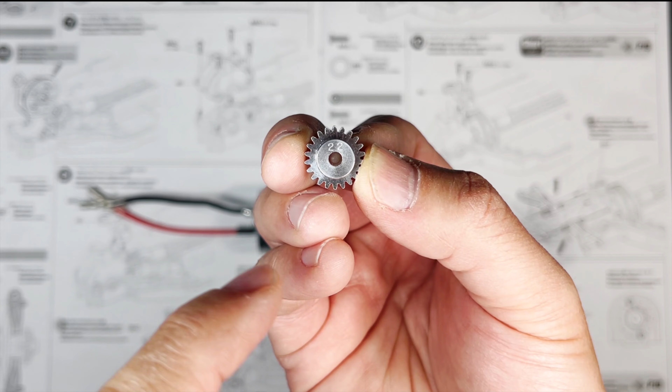This TT-02 kit comes with a 22 tooth pinion gear. That's the number of teeth that goes around the entire gear. There are option parts that have fewer or more teeth. And the number of teeth on the pinion gear and spur gear affects the acceleration and top speed of the car. But that's also another video all by itself.

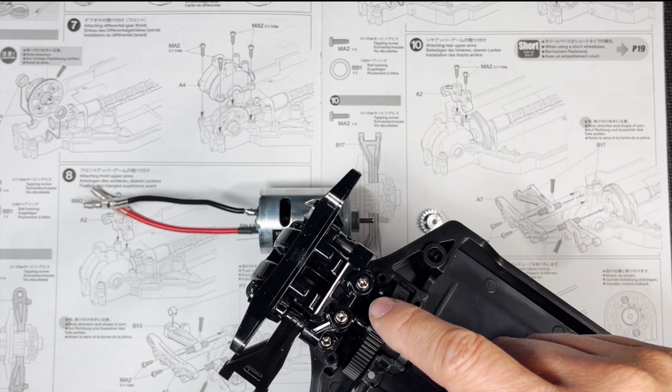For now, we only have to work with what's in the box. So when the motor spins, the pinion gear is going to spin the spur gear. The spur gear and the shaft is going to spin the differentials on both sides, and the differential is going to drive the wheels.

We'll talk about the relationship between all of the electronics and the car's systems in an upcoming video. All right, let's get started with step 11.

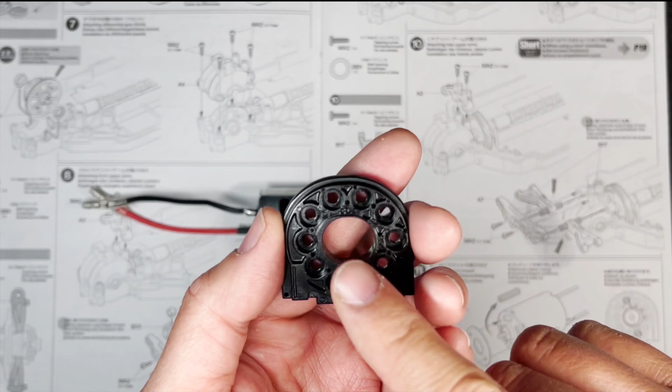First, let's take a look at the motor mount. There are numbers stamped next to all these holes. Starts at 21, 22, 23, 24, etc. And on the opposite side, it starts at 16 and it goes to 20.

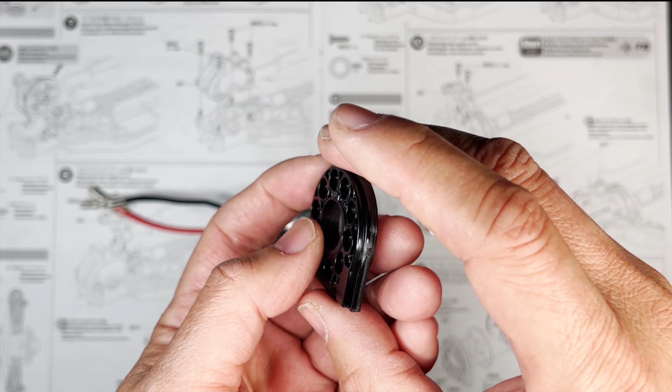And again, we have a 22 tooth pinion gear. And Tamiya made it really easy. The holes on the motor mount is going to correspond with the number of teeth on the pinion gear. So we're going to be working with hole 22 right here and then directly across, which is this one.

And so we're going to be screwing it onto the corresponding holes on the motor, which is going to be this one and this one.

And to fasten the motor, we're going to be using this MA4 screw. If you take a close look, you can see the teeth are a lot closer together. This is the MA2 screw we've been using a lot. The grooves are a lot further apart and it's slightly tapered top to bottom.

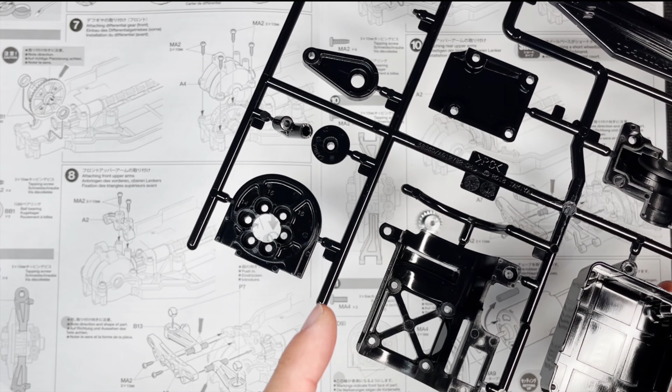And for whatever reason you want to use a smaller motor, there's a 380 size motor mount right there.

All right, to get started, first by putting this motor plate onto the two holes. I'm going to line that up. And I'm going to assume this motor plate is a heat shield between the motor and the plastic motor mount. So I have to make sure the holes line up, press it all the way down.

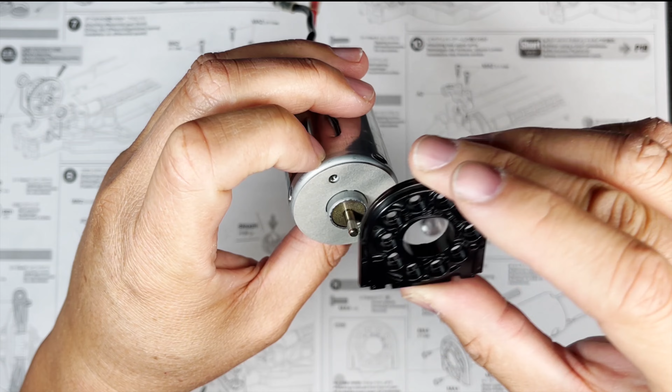And I'd like to have the label right side up when it's in the chassis, so I'm going to be using this hole on top. And on the motor mount, this would be the top, and this part goes into the chassis. So I'm going to make sure hole 22 lines up with that top hole right there, like that. And then start driving the screws in.

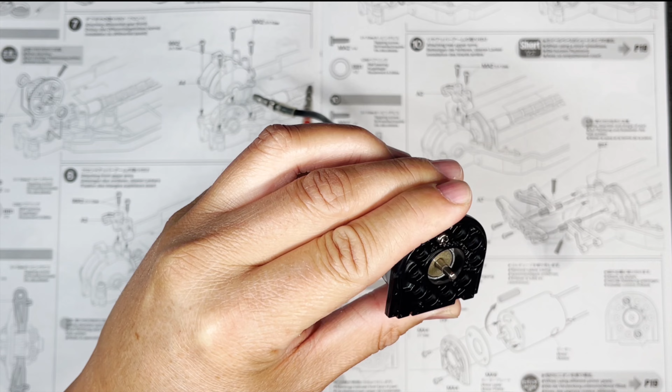Just like that. You notice there's a little box here. When using different pinion gears, go to page 19, just like we had up here with the short wheelbase.

Let's take a look at what's on page 19 for the pinion gear. It talks about the different gear ratios you can achieve when using a pinion gear, either with fewer teeth or more teeth. For example, when using a 16 tooth pinion gear, you're going to turn the motor mount over and use these two holes to mount the motor. The gear ratio is related to the acceleration and top speed of the car, but that's a different video.

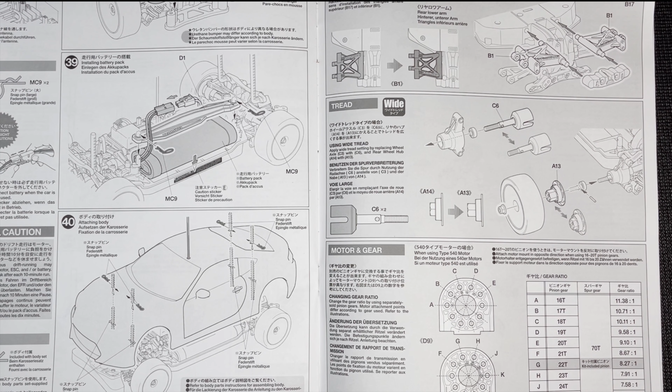All right, let's move on to step 12.

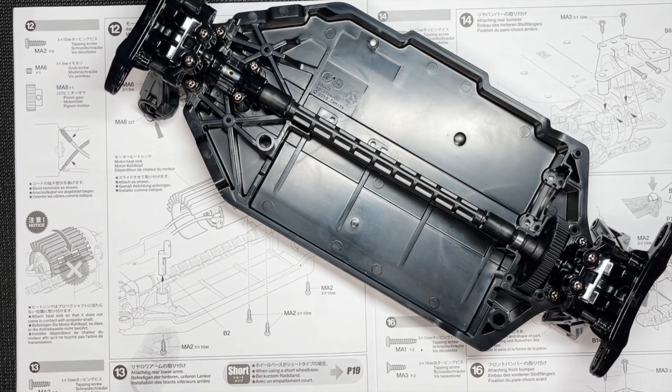For this step, we're going to need the chassis, the motor, the pinion gear, and the grub screw, 8 of these MA2 screws, the spur gear cover which was on the D tree, 2 battery posts, 1 of each was on the B tree, the heat sink, some grease, and a 1.5mm hex screwdriver. If you don't have one, there was a hex wrench included in the kit.

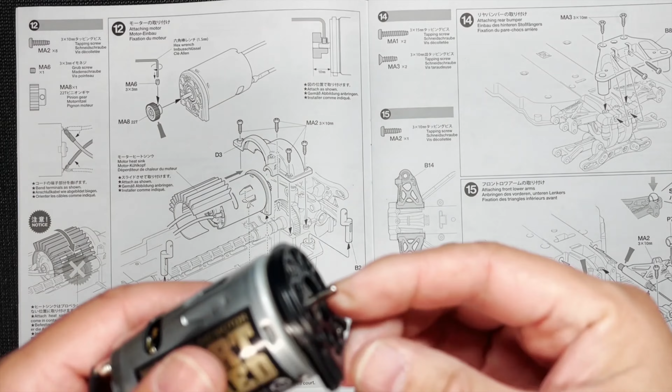Before we attach the motor onto the chassis, we need to put on the pinion gear first. So first we're going to thread the grub screw onto the pinion gear. Then we're going to find the flat spot on the motor shaft, and I'm just going to turn it all the way up to the top. We just need to make sure the grub screw matches up with that flat part, and we're going to just loosely screw that in.

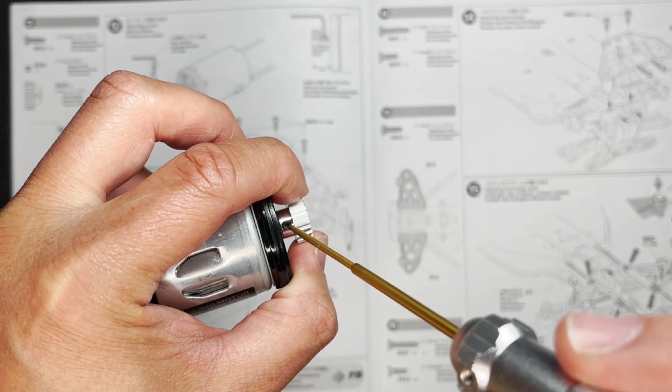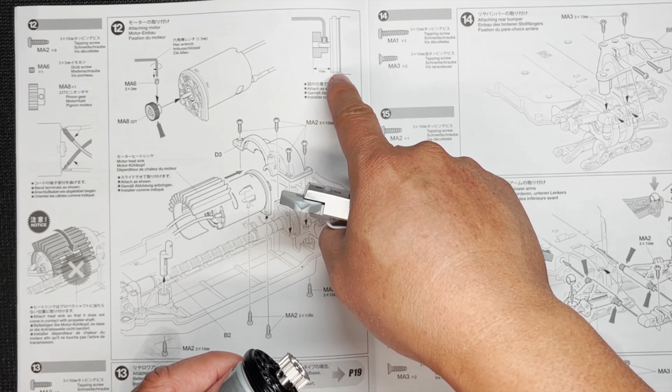If you see here, it needs to be 10mm from the top of the pinion gear to the face of the motor mount. That's going to be pretty close. I'm going to see what it looks like when we mount it onto the chassis and how it lines up with the spur gear. That's what you would do if you don't have a caliper.

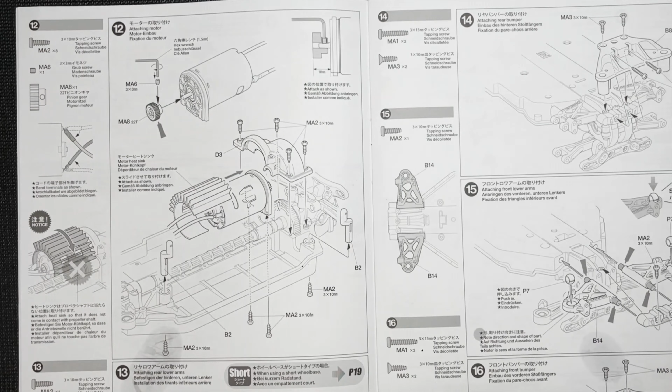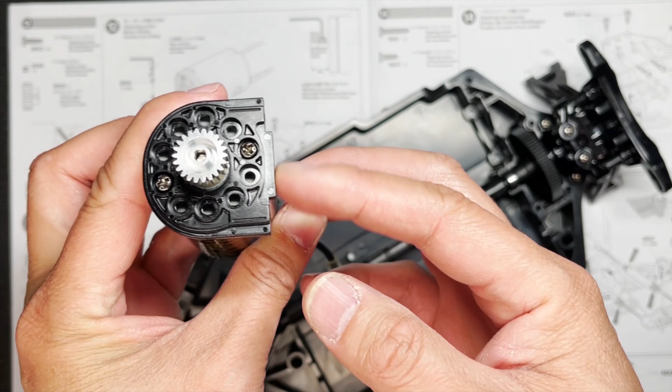Before we put this into the chassis, we're just going to need to bend these terminals in a little bit to get the wires out of the way. Let's bring back the chassis frame. You can see there's a little cradle right here, that's supposed to line up with this part of the motor mount. Just going to drop that in.

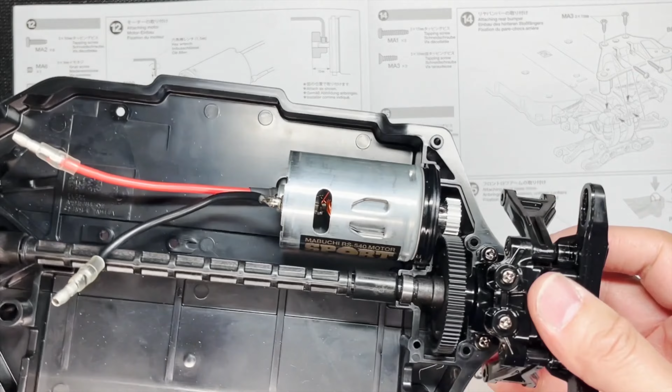I'm just going to check the alignment between the pinion gear and the spur gear. They're lining up pretty close. The pinion gear isn't higher than the spur gear, nor is it below the spur gear? If you were doing this without the caliper, that's how you would eyeball it. You just mount the motor and take a look at the alignment.

Now I'm just going to tighten that grub screw. Now we're going to turn the chassis over and put the screws in here and here.

And while we're working on the bottom, let's go ahead and place these battery posts.

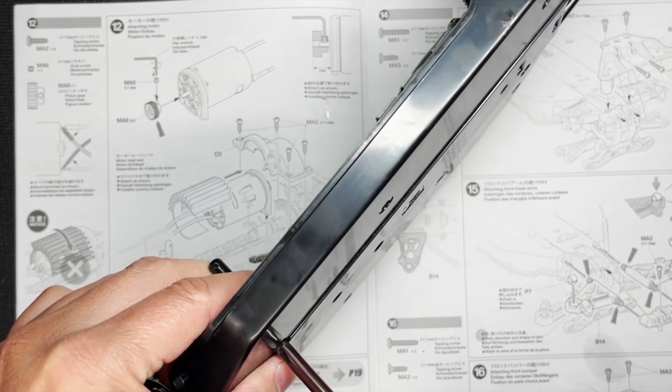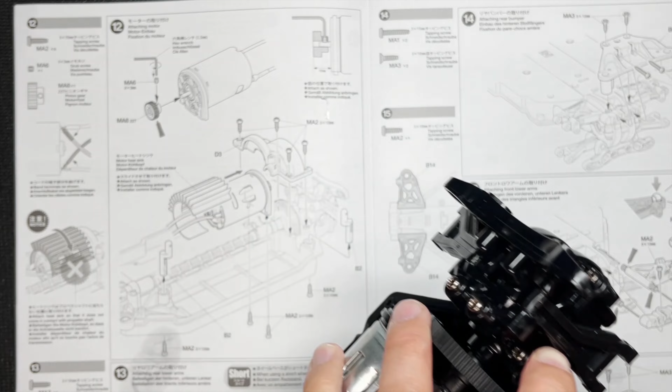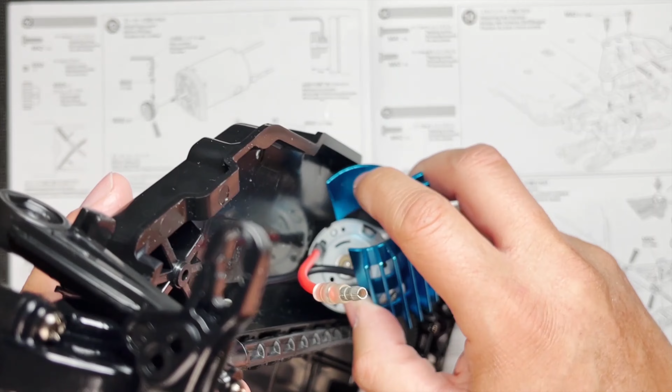We could have slipped the heatsink onto the motor before we set it down, but it's not that much harder to get it in here. Then make sure to turn it over so that it doesn't interfere with the drive shaft.

And lastly, we're going to put on the spur gear cover. Just going to set that down. The plastic on the spur gear cover is pretty brittle, so try not to over tighten these screws.

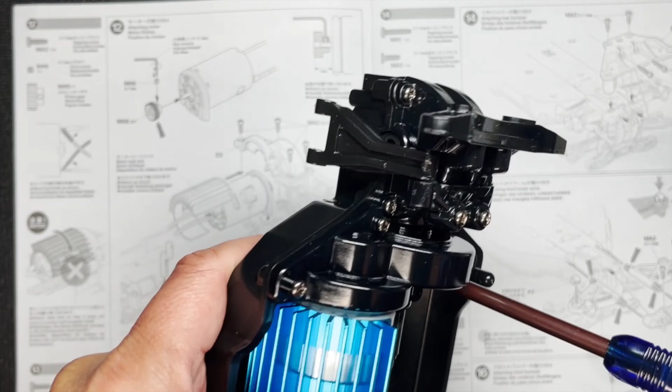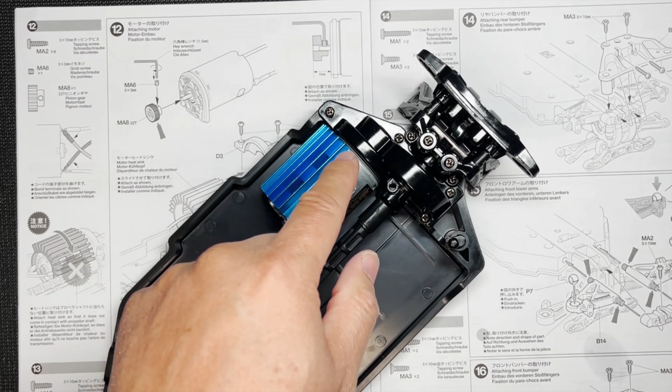All right, and we're done. So today we attached the motor to the motor mount. We put on the pinion gear, set the motor into the chassis, closed it up, put on the heat sink, and also put on the 2 battery posts.